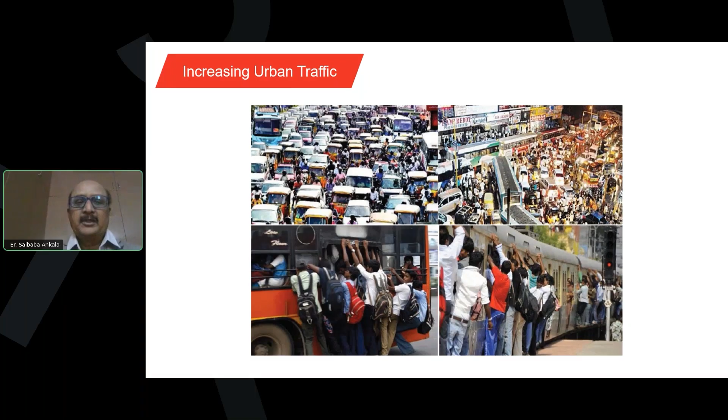So let me start with the basics, just to have a foundation why a metro is required in cities. We all know that the traffic is tremendously increasing day by day, and the existing roads are straining with the traffic, and there is no scope for increasing or augmenting the capacity. So there is definitely need for MRTS in major cities and also tier 2 cities, which Ministry of Urban Development

has already notified. And some of the factors which are required to decide the type of MRTS, because there are different types of MRTS. Metro is one of the options. So we have to evaluate the various options available before deciding on metro, because metro is cost intensive and also takes more time for construction.

So I have listed down these factors here: safety and speed, comfort and economy, technical constraints, reaching the masses, mode integration. The different modes like railways are there, then bus service is there, then the MRTS is there. All the 3 modes have to properly integrate with each other so that passengers will have the last mile connectivity. Some of the options which I have identified and which we have studied for the various metros are like this.

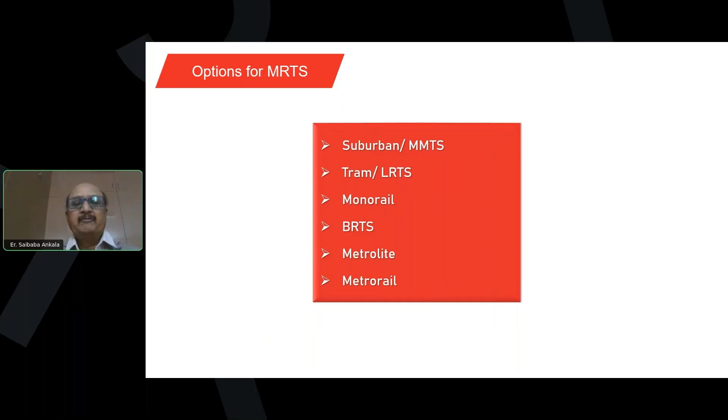And if I go a bit in detail, MMTS, multimodal transport system, is somewhat popular in Hyderabad. Though it has got some advantages of being cheap, because the existing railway network is more or less used, existing railway assets are also used. So the additional infrastructure required is not much, and it can carry high capacity. But on the demerit side, we have limitations. MMTS has got fixed corridors. Only wherever railway lines are there can these MMTS services generally be provided.

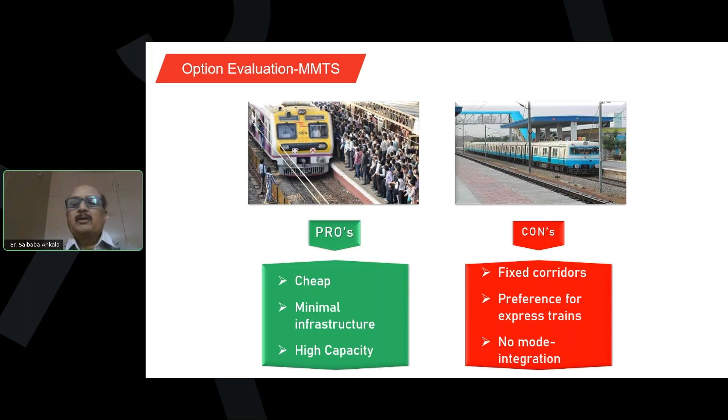And the preference will be given for express trains. If it is a mixed type of traffic where the normal trains are also provided, then MMTS trains will be given less preference. And mode integration is not very much achieved in this type of transportation system.

The second option, of course, is the trams, which is popular only in Calcutta in India, but in the European countries, this is a very popular form of transportation. If somebody has visited France or Geneva or Switzerland, it's a very popular system and very efficient system. So it is always better to study the options of tram also.

So on the pro side, we have being cheap because it's on the existing road. We lay the tracks. There is no additional infrastructure required. Only rails are to be laid and overhead electrification, if required, has to be laid. And coming to the con side, it is a bit slow and it is unsafe. It occupies the road space and also it is inflexible.

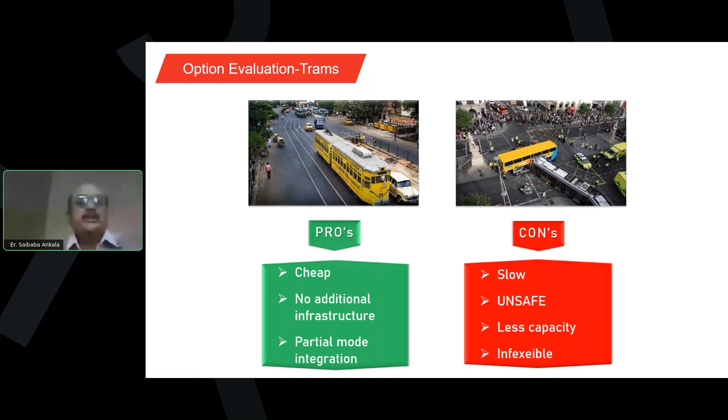The other option, third option, is monorail. It is there in some of the cities in India, like Mumbai, where they found that it is very cheap. It can suit very sharp curves also, and it occupies less space and is good in mode integration because it can be laid on the interior parts of the cities also, where the width of land available is less. But the main drawback is capacity is very less.

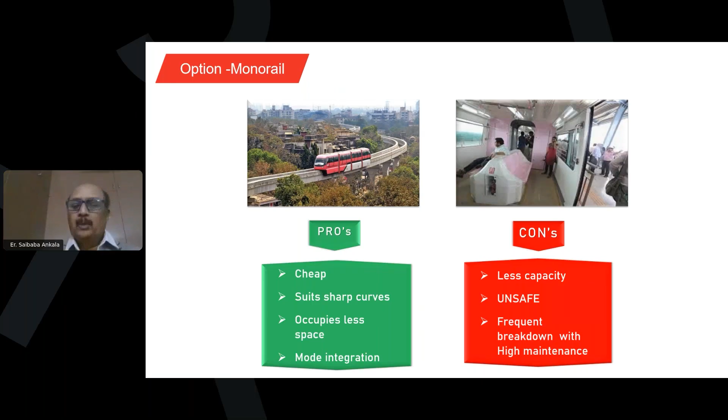So it cannot take the peak capacity which is demanded by a major city, and it is a bit unsafe. Some accidents have been reported on monorail also, and breakdown has also been noticed and reported, causing high maintenance costs.

The fourth option is BRTS, Bus Rapid Transit System. This is also popular. I myself have seen in Ahmedabad. It's very efficient and people are very happily using this service, mainly because it is connecting to the different parts of the city by road, and the connectivity to the other modes is very much feasible and it is very energy efficient. But coming to the con side, this type of luxury cannot be accorded in cities like Hyderabad

because it occupies more space. Dedicated lanes are required. You can see here the buses are running happily, but on the right side, the regular traffic is totally congested because they have sacrificed one of the lanes to the BRTS. So unless we have adequate land, this may be suitable for greenfield projects and new corridors, but not for the existing cities.

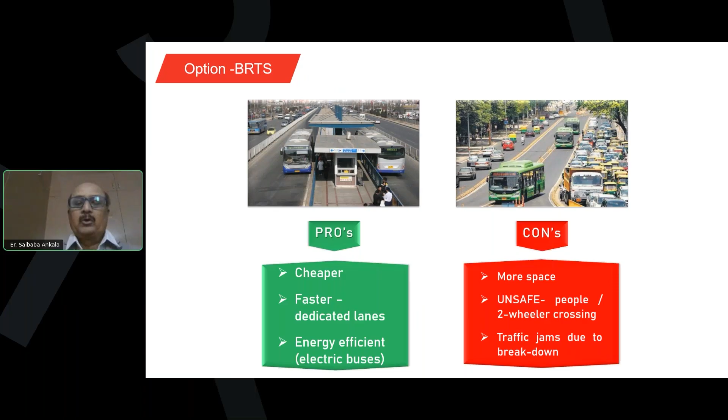There was a talk about Metrolite, which is somewhat similar to tram, but it has not taken off because its technical feasibility is still not established. So this option also is not feasible.

And then metro rail, the pros are it has got a higher capacity. It's a clean and green type of transport system, safe and comfortable because it's fully air conditioned and it is fully elevated or underground with tracks well designed. And the speed also is very high because we can design the system for a maximum of 70 and 80 kmph.

But on the demerit side, the capital expenditure, capex, is very high, and the time required for construction is high, and even the opex, operational expenses, are also high. The maintenance of all the rolling stock and the assets is going to be high.

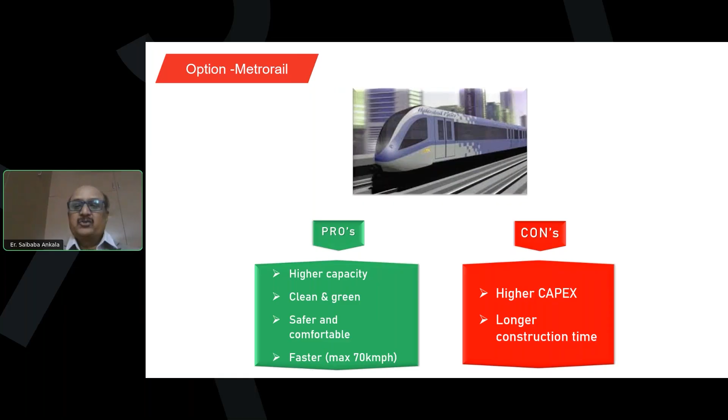But overall, I'm talking in the context of Hyderabad, we have noticed that yes, metro rail is having a lot of overriding merits compared to the other modes, which I have listed here: speed and reliability, environmental benefits, economic advantages, and urban decongestion. So, because of this, metro rail has been chosen for Hyderabad, apart from the other modes which are already available, and the gauge which is required for the metro.

How to decide the gauge? We have broad gauge in India and also meter gauge. Broad gauge is also called the national gauge because we have 1.25 lakh kilometers of it. So as a common man, the thinking will be, why can't we go for broad gauge so that we can integrate the metro also into the existing railway network?

But the thinking is wrong because the metro rail will be totally having a different corridor, different crowd, different passenger traffic, different logistics, different frequencies. So broad gauge is not necessarily to be provided. Then what is the gauge to be provided?

Overall, if you see the 34 countries in the world, the gauge that is being used for metros is standard gauge, which means that standard gauge is already a proven system. Already the technology is available, the system is available, the equipment and the people who have worked in this type of standard gauge, and the rolling stock and all the other subsystems are readily available off the shelf for standard gauge.

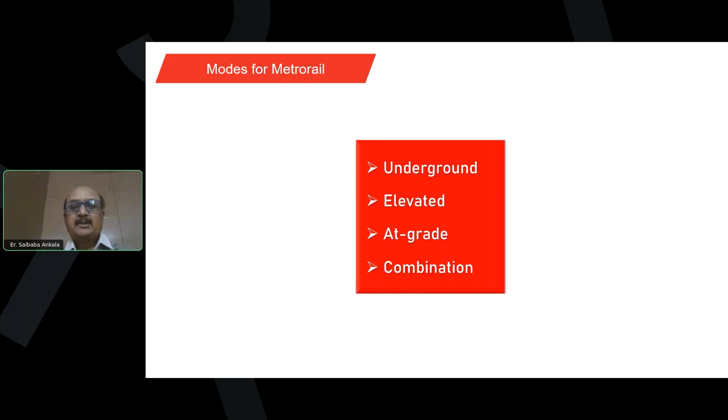Another advantage of standard gauge compared to broad gauge is that, being a slimmer gauge, it can negotiate curves in a much better manner. Once we decide the gauge and the metro rail, the next step is how to take it, whether it should go underground, elevated, at grade or a combination. So quickly we'll see the various options and how we evaluated them for Hyderabad Metro.

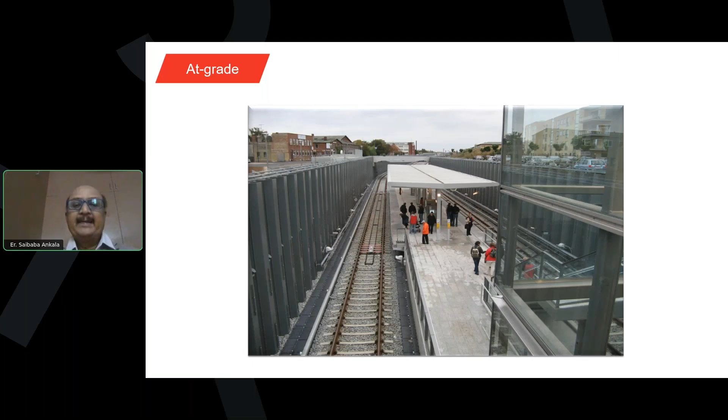So this has been ruled out for Hyderabad Metro. At grade means the metro will be at the same grade as the existing road. But here again, we need a lot of space. Like I explained in the previous slides, a separate dedicated corridor with a fenced, barricaded area is required to run these metros at grade. So this is next to impossible for a major city like Hyderabad, where all the roads are already highly congested and we don't have any spare capacity for the metro at grade.

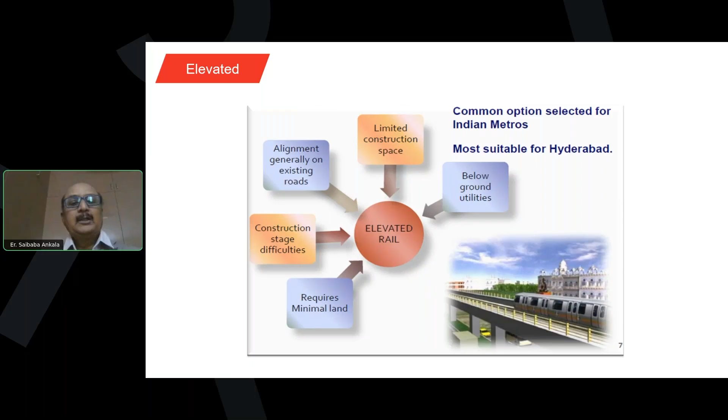So the third option is elevated, and this was found to be most suitable for Hyderabad, because there is no need for underground or at grade. Very good rock is available at shallow depths of 4 to 5 meters, so open foundations can be constructed, which are most suitable for viaducts and also most economical. So finally, Hyderabad Metro has 3 corridors, total 70 kilometers, and all 3 corridors have been provided with elevated viaducts.

Critical issues specific to elevated metro: because metros are generally constructed well within the city, there are some issues which need to be addressed properly. There's a lot of noise, vibration and pollution generated due to construction activity, which has to be minimized. We followed international safety norms, had a team of experts from different backgrounds monitoring these activities, and ensured the work is mostly during night times, when traffic is less and progress can be better.

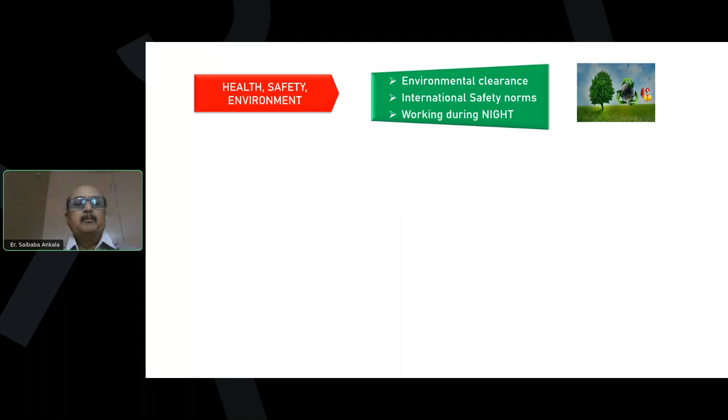Restricted space. We have to work, as I said, well within the right of way given to us, and this is forcing us to innovate. So fast track construction is one important innovation we developed here, which comprises precasting and mechanized launching. We also ensured that site activities are minimized, except the foundation and the pier. All the activities are done with machines and with least manpower intervention.

Road traffic control. In spite of minimizing the space required for construction, some road diversions and traffic control are required. So we regularly coordinated with the traffic department, the police department and the home department, and ensured proper barricades and signages are provided. And when we work during night time, proper lighting is also provided.

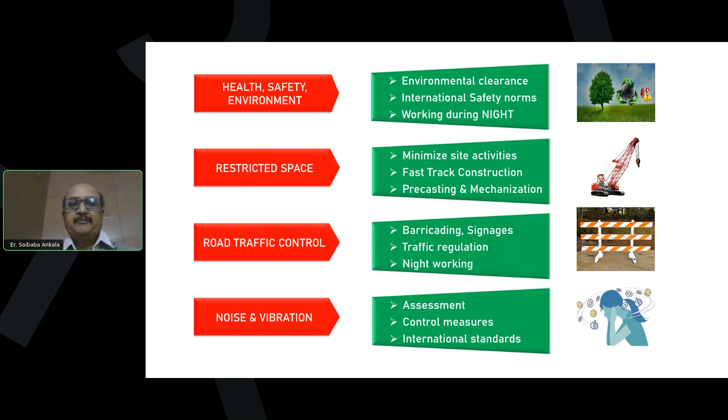Noise and vibration: again, as I said, we followed international standards, and it is properly assessed using instruments, and whenever it goes beyond limits, the control measures suggested by the experts are introduced so that the local people, road users and the general public are not disturbed much.

I will talk a bit about the systems in metro. Systems are like departments in a government or private organization. We have different departments, so here in metro, we call them systems.

So some of these systems are STC, that is Signaling and Telecommunication System. Then rolling stock, AFC stands for Automatic Fare Collection. O&M, Operation and Maintenance. These are the non-civil engineering. And for civil engineering, we have viaduct system and the yard system, depots, the track system. And then electrical department, we have overhead traction power supply department.

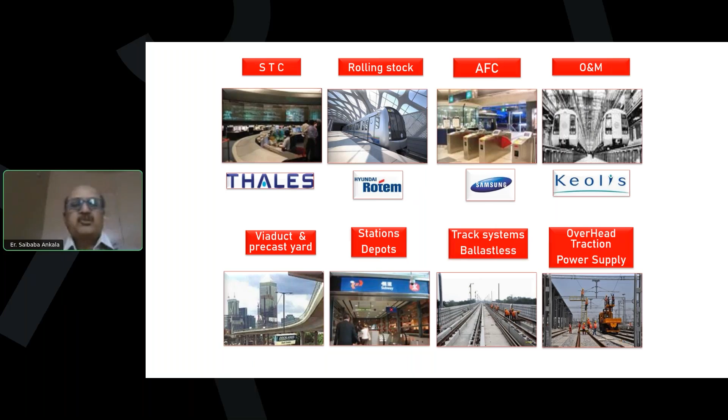Briefly, I'll explain what is the type of system which has been provided in Hyderabad Metro. The communication-based train control system, which is the latest in the world, has been provided here. So the advantages are there is no need of signals. Of course, signals are provided as a second level of defense, and onboard computers are there which control the trains. And the trains can communicate with each other. They can talk to each other.

If they come very close, then the train at the back will be braking or stopping or slowing down. So the end result is we can run more trains at less intervals. That means more frequent trains. So this is the principle of CBTC. The first train can communicate with the following train and accordingly control its speed, which means that the entire block system, if somebody knows about the block system, we call this a moving block, concept of moving block.

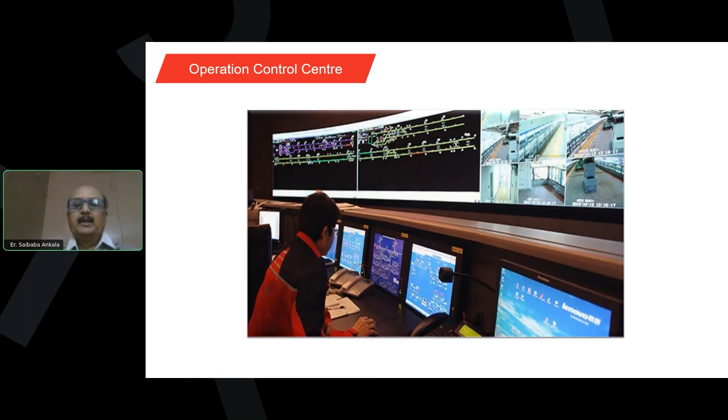And the whole operations are controlled in a central location, which is called the Operation Control Center, where people will be continuously monitoring the movements of the trains. Rolling stock. Rolling stock comprises the passenger coaches or cars, as we call them. And they have got the dynamic air conditioning system. That means the air conditioning gets controlled depending on the number of passengers inside. And 3 cars can hold a total of 960 passengers, including sitting and standing.

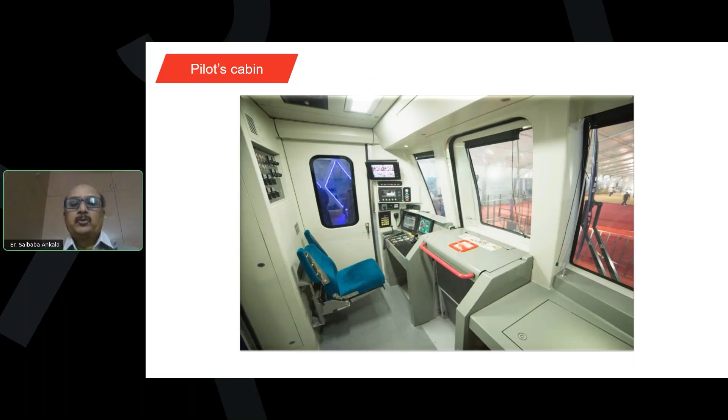This is the cabin of the pilot, which is fully equipped. The pilot's role is just to open and close the doors. He has no control on the train as such, because as I said, the onboard computers in consultation with the OCC will be controlling the trains. Some of the features inside the rolling stock: it has got disabled friendly features also, and dynamic maps, which give an indication of what is the next station coming and what is the duration. And when new pilots are inducted, simulators are available for training them.

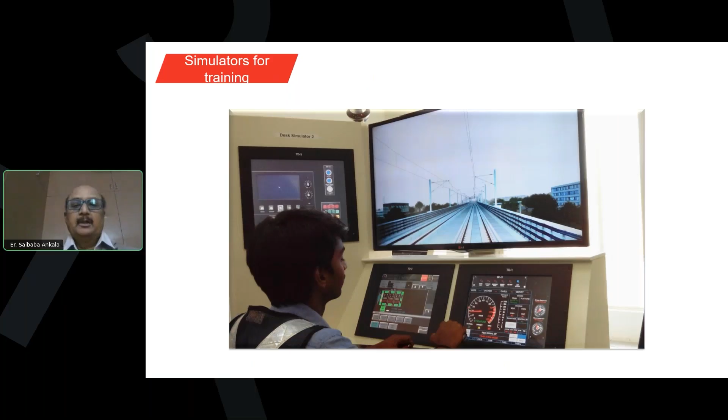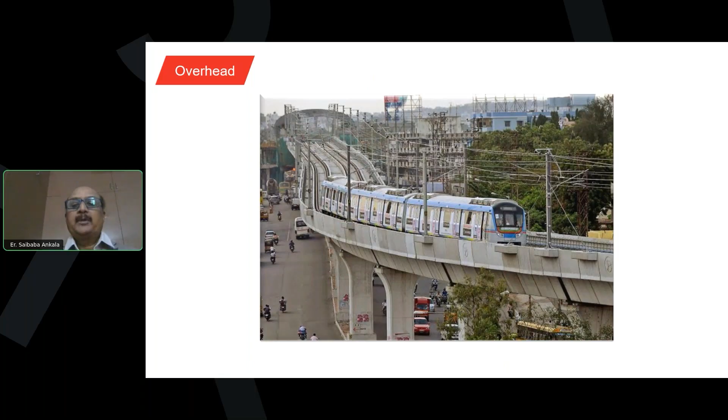The traction means the energy, how the train receives the energy for running. There are 2 systems in metro. One is the overhead electric traction, and the other one is the third rail. So overhead electric is the most common one, which is similar to the Indian Railways electrification system. The electric wires are on the top, connected by masts at regular intervals.

Whereas in the third rail, there are no masts, but a third rail, as they call it. It is there adjacent to the railway track, and the shoes are there which collect the electricity from the third rail, and then that is used for running the motors. So in the Hyderabad Metro, the overhead electrification system was found to be more technically feasible, and that was adopted.

Track system, again, we have 2 different systems, ballastless track and ballasted track. Ballastless track, as the name says, there is no ballast and there is no sleeper also, as we see in a railway track. The advantage is the track is directly embedded into the RCC plinths, as a result of which there's not much of a disturbance to the geometry. It is almost like a fit and forget type of system. But how is the ballast replaced, because ballast provides resilience? That is provided with the special HDPE pads and a combination of elastomeric pads under the tracks.

Ballasted tracks, yes, that is still used. We have adopted it in the depots, where all the trains will be coming for inspection and maintenance. All the other activities of the rolling stock will be performed. So there we have gone for ballasted track.

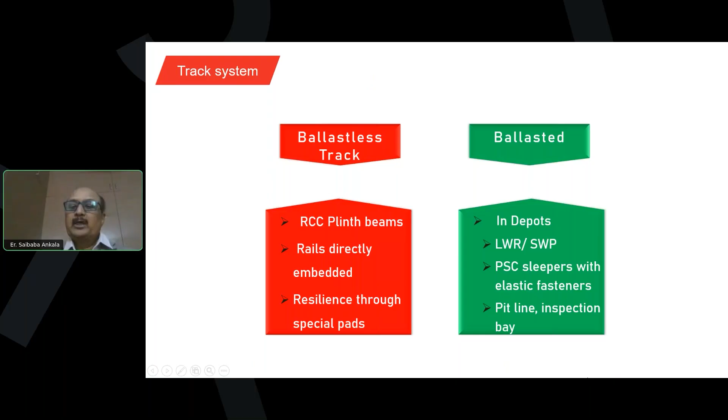This is the ballastless track visual which I am showing, which is directly embedded into the RCC plinth. The RCC plinth is in turn integrated to the viaduct top slab. So this is the system of a ballastless track. And these are the various components. You can see 3 levels of pads are provided to give the resilience.

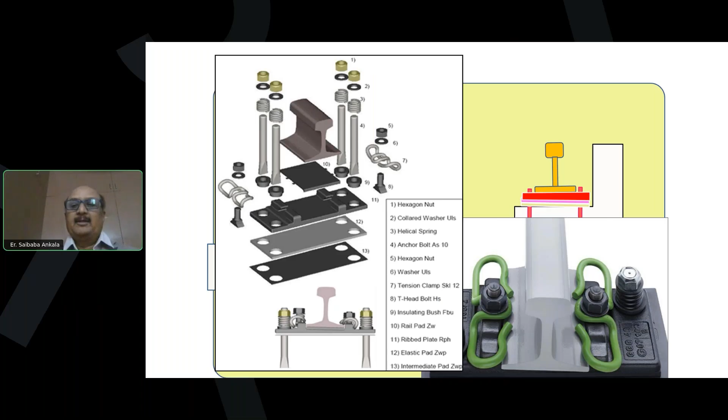Now, coming to today's main topic, optimization. Why optimization is required in metros, especially because viaducts are something which are highly repetitive. We have the option of deciding the number of spans and repeating the same spans. If it is segmental, then segments also will get repeated. So there is a scope for optimization as the quantity of the items is very much on the higher side.

It is in thousands. So even if I can save 1 lakh rupee on one unit, then I can save crores of rupees. That is why optimization is required for elevated metro, because it directly reduces the capital cost and construction timelines. Brief example of why optimization will be helpful in concrete, which is required for this is again for Hyderabad Metro project. Approximate requirement of the various materials.

Concrete is 19 lakh cubic meters. So you can understand, even if per cubic meter you can save 1,000 rupees, you are going to save a huge amount. So innovation and optimization is the key, and this is what has been achieved by doing a lot of innovative measures in the concrete, like adding fly ash and adding manufactured sand. This Hyderabad Metro is the first metro where not even a grain of natural sand has been used. It's all completely manufactured sand.

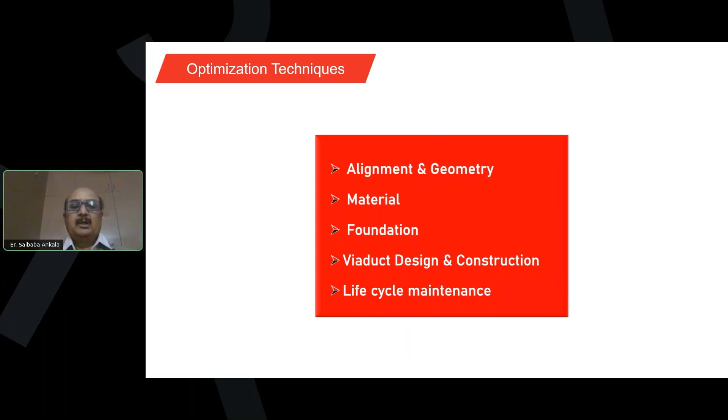Optimization techniques which we have followed and which fields we have applied is like this: alignment and geometry, material optimization, foundation optimization, and the most important, viaduct design and construction optimization, and life cycle maintenance optimization. I'll briefly talk about each one of them.

Alignment and geometry. So curvature has been properly taken care, because existing roads have very sharp curves. We cannot take such sharp curves not only from safety, but also comfort point of view, and also providing the required super elevations and maintenance. So this has been minimized at the same time to ensure that the required curvature is provided. Then the vertical profile also similarly, we have avoided steep gradients, and the stations are always on the straight and level alignments.

Span arrangements, because the viaduct is all along in the median, so we have the full control of the arrangement of spans, especially on the straight reaches, and we have provided uniform spans to the extent possible so that standardization can be easily adopted. And super elevation also has been optimized here in Hyderabad. Again, I think this is the first of its kind when it was constructed. I'm talking about 10 years back.

The super elevation or the cant provided for the plinth on the curves has been provided as per the simulation studies, duly considering the speeds of the rolling stock. As it approaches the stations, it comes down, again it picks up. So all that has been simulated, and accordingly, the speeds on the various curves are different. Though the design speed of the entire section is 80 kmph, each curve has got its own design speed depending on its location. So this way also we have optimized the material consumption.

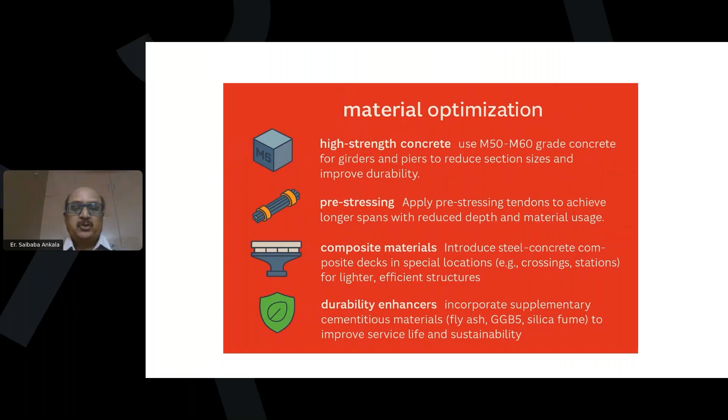Foundation optimization. Geotech matching is one concept which has been adopted here, where we have grouped the foundations based on the SBC criteria. Pile foundation was very much limited. It's only for the larger spans where we have gone for pile. So there is not much scope for optimization there. And soil improvement, wherever the soil was not to the required standard, especially in the depots, we have done the soil improvement measures also. And for foundation excavation, we have used trial trenches and GPR, ground penetrating radars, to ensure that we are not damaging any existing underground utilities.

Construction optimization by precasting and pre-assembly and mechanized launching. And the launching girders used are also designed by our own team, to ensure that it is suiting the requirement, and also for the curvatures which we are having on the metro rail. We used to get almost 3 spans per week.

Balanced cantilever bridges have been used at road junctions, especially where longer spans are required. But at the same time, we cannot take any support from the bottom. So the entire balanced cantilever construction has been done without obstructing the road traffic below, either from traffic point of view or from safety point of view.

And of course, for the road over bridges at 2 places like Secunderabad and other location, we have 80 meter span. So we have gone for composite through girder bridges. And for the stations, we have used the spine and wing concept, which was almost a very new and innovative concept, which I'll be explaining to you in

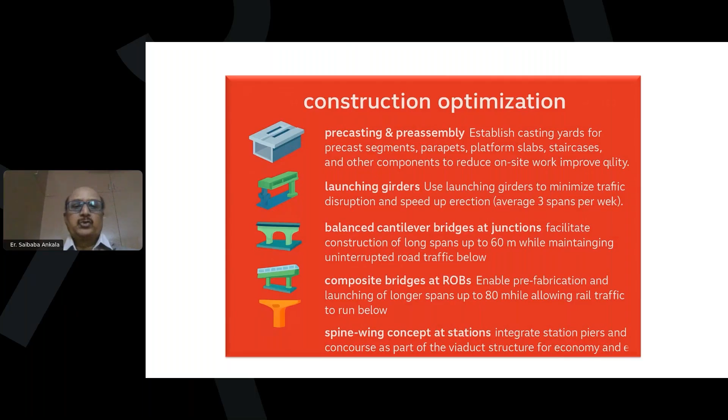the due course. Similarly, for the life cycle maintenance, because the Hyderabad Metro was constructed on BOT basis, maintenance also is a part of the contract. So optimization of maintenance was also found to be very much necessary, and maintenance has been achieved by ensuring that we have durable material there, which requires minimum maintenance and inspection efforts like durable bearings and expansion joints, and surface treatments, then access provisions so that each and every part can be easily accessed by a person and can be

inspected carefully, especially the segmental girders. Joints between the segments ought to be carefully examined, especially at the bottom where the tension is there, to ensure that there is no crack or there's no opening. I will talk about only two systems, viaduct system and station system, where we have done the optimization.

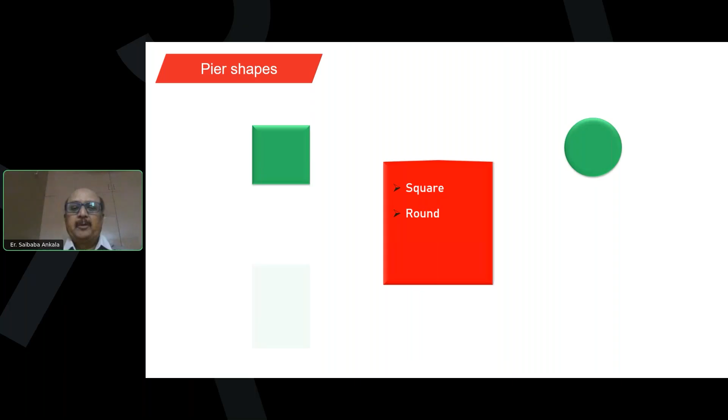The shapes of the pier, we have different shapes of the pier depending on the location, but most of the locations we have adopted the square to fit into the median space available. So it is something like this. The median space is 2 meters. So to the extent possible, we have ensured that it's a 2 meter square pier. If at all more width is required, then we used to make it as a rectangle, but the 2 meters is not compromised because that is the maximum that is allowed.

And we have ensured that a crash barrier of 1 meter height is provided all around the pier so that the forces which are coming due to impact of any accidental vehicle will not be directly felt by the pier. It will be absorbed by the crash barrier. And the profile is so selected that the stresses also flow in the same direction. The flaring up of the pier cap and the box girder is an indication of the pier and superstructure profiles from a width of 2 meters almost up to 14 meters at the top has been achieved.

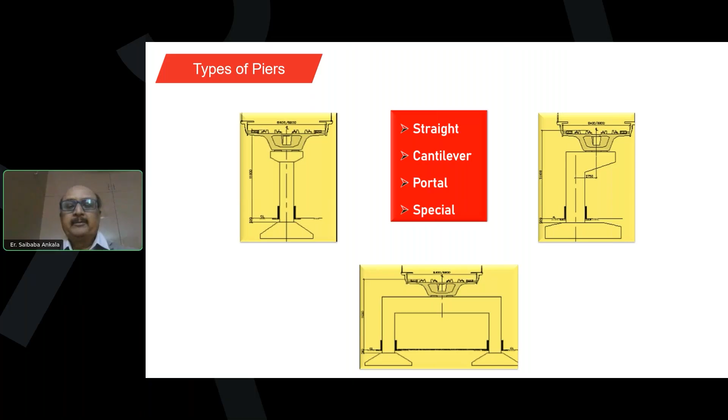Coming to the types of piers, because depending on the location, we need to provide either a straight pier or a normal pier, we call it, or a cantilever pier, where the pier at the top is having a small cantilever on which the segment is supported, or a portal. Sometimes we have special pier like a hammerhead pier, we call it, or a station pier. These are special piers.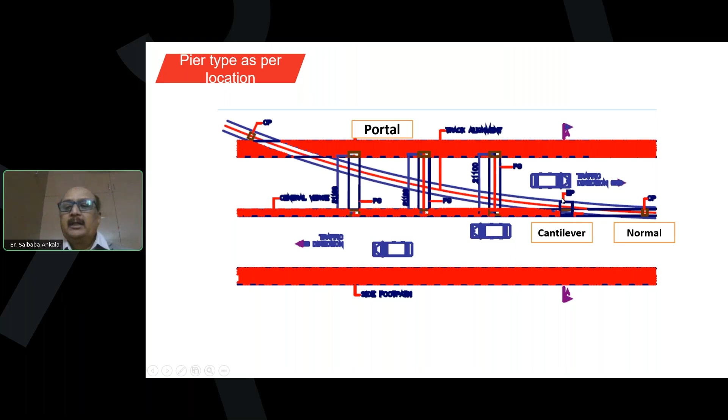You can see this is the metro which is crossing the road. This is the highway which is crossing the highway going to the median. So here we have portal piers, and here we have cantilever pier, and then it comes back to normal pier. Normal pier looks like this, a cantilever pier looks like this, and then a portal pier. You can see that a limitation is there for the cantilever. If the alignment is at the center of the carriageway, then we cannot have a cantilever, we have to go for a portal pier, and it is like this.

And coming to the viaducts, there are several options available, and we had to evaluate all the options, not only from the economic point of view, but also from the logistics point of view, how to cast them, how to bring them to the site, how to construct them. So, however, we made a detailed analysis of all the options, and finally, we have adopted the most popular option of box section, trapezoidal box section.

Some of the advantages of having a box section, it is a more optimal section, being the entire area is only confined to the periphery, and its torsional stiffness is also very high. And the top width can be varied depending on the requirement. Of course, this is not adopted because metro requires 2 tracks, and we have adopted the straight normal box shape.

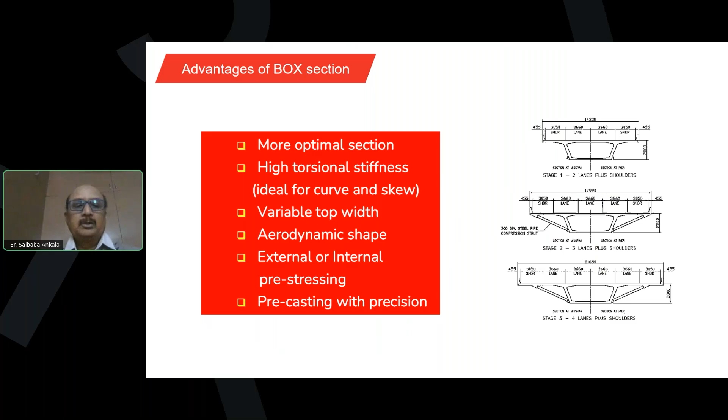Advantages of segmental. It is ideal for fast track construction, and we can do the standardization of span, and we can optimize the design and control the geometry in a much easier manner. How to decide the optimal span? Because there are different studies which are to be done before we decide what is the optimal standard span.

So these are the various factors which I have listed. Important among these is the RSI studies, that is rail structure interaction. Due to the welded rail, LWR, we call it long welded rail, and the simply supported girders, there is an interaction between the two, due to which heavy forces are applied by the track onto the girder and vice versa. So this depends on the span length.

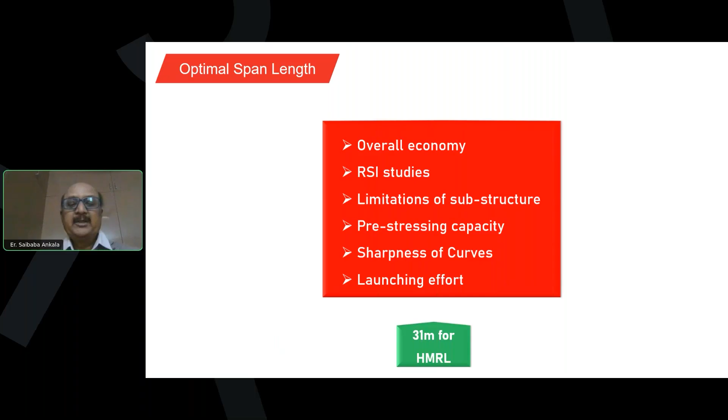So we cannot have very high lengths because the forces will become beyond control. So this is one criterion which we have to evaluate while we decide the optimal span length. So with all the studies for Hyderabad Metro, it was found that 31 meters was the optimal standard span.

And a segmental bridge span is constructed in segments. The box shape gives the torsional rigidity. Generally the pier segment is a shorter one because it has got a diaphragm inside, so it is a very heavy section. So it is shorter, its width is lesser compared to the normal segments. And it all depends on the lifting capacity of the gantry.

I've listed the various advantages of the segmental bridges. Long spans, it is economical, efficient use of materials, because pre-stressing material can be used in a very optimal manner. Then fast track construction, minimal traffic disruption, reduced environmental impact. These are some of the points.

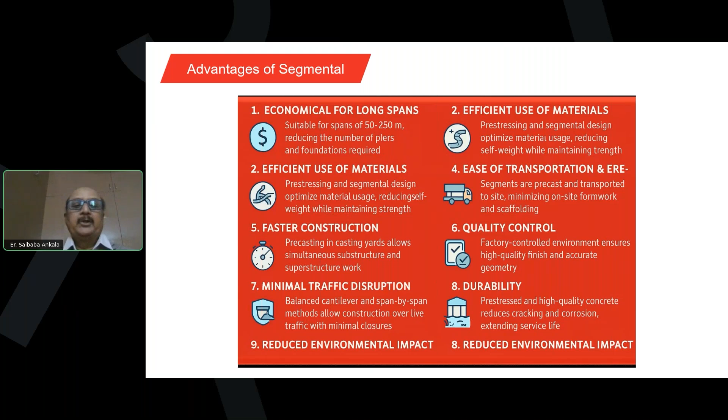And box section, which I have already explained, the advantages of having a box section: high torsional stiffness, efficient load distribution, reduced self-weight, and aesthetically it's a slim profile. Some metros use the inside space for utilities, for running cables and for running pipelines.

How we have optimized the design, you can see here the different segments: S1, 2, 3, 4, 5, and again 4, 3, 2, 1. So S1, 2, 3, 4 is like a mirror image. S5 is a common segment, which is like a joker in playing cards. I will show you later the importance of S5.

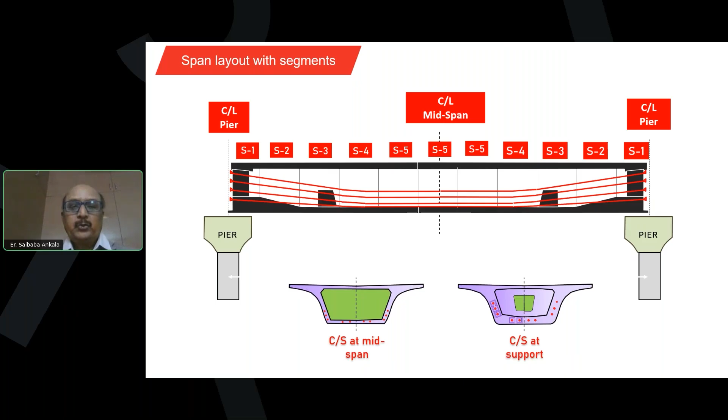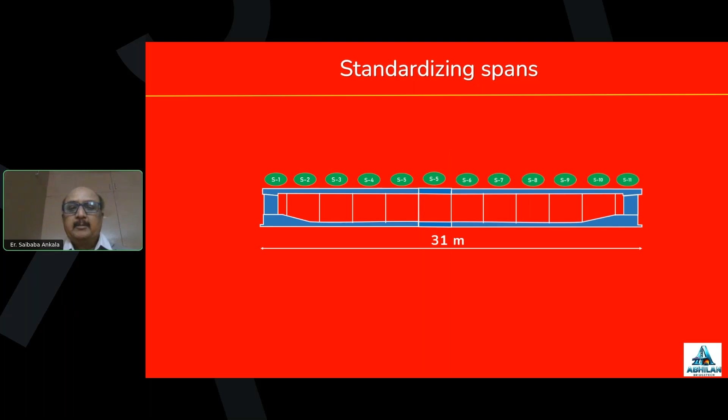For the construction of segmental spans, there are 2-3 methods available: long line method and short line method. Before that I will explain how the standardizing of the spans is made. You can see here S1, 2, 3, 4, 5, again 6, 7, 8, 9, 10, 11. Now, if I have to increase the span, I can simply add one S5 segment, which makes it, earlier it was 28, it becomes 31. Similarly, by adding another S5 segment, I can make it 31 to 34 and 34 to 37.

So this is the most important advantage of segmental construction, where we can standardize the span, and just by adding or removing one standard central segment, we can use the entire assembly for the different spans.

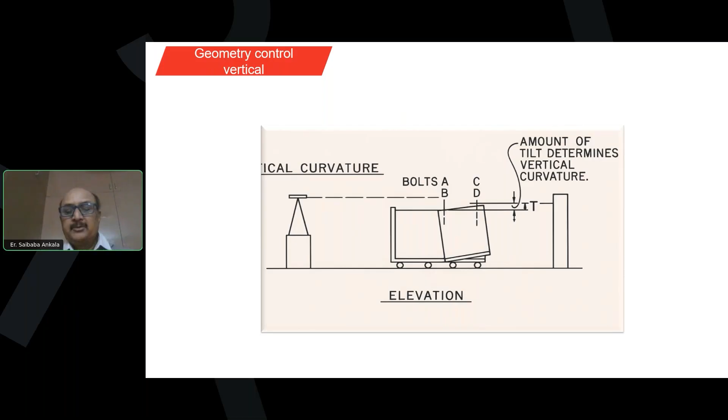Precasting is generally done by short line method. This is the casting yard. Short line method is generally adopted in the casting yards, but this requires a huge amount of geometric control because the viaduct will be curving both in the plan and in the vertical profile because of the vertical curves and horizontal curves. How it is done, I'll just show you in some sequence of segments.

The first segment is cast as it is, and then it is moved to a further location, and then it is rotated slightly to the degree which is required as per the actual alignment. And then the second segment is cast by keeping the first segment as the support for casting.

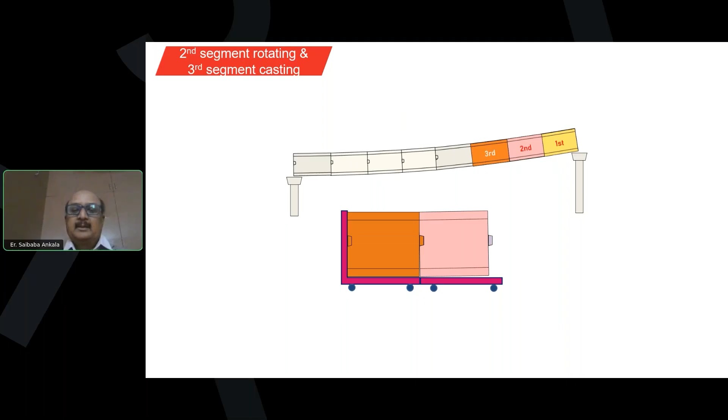And then the first segment is removed, and now the second segment is slowly rotated to the extent required, and the third segment is cast. So this is how the casting is done, by controlling the geometry and giving the vertical profile during casting itself so that it will achieve this profile during launching. A small video on how the casting is done.

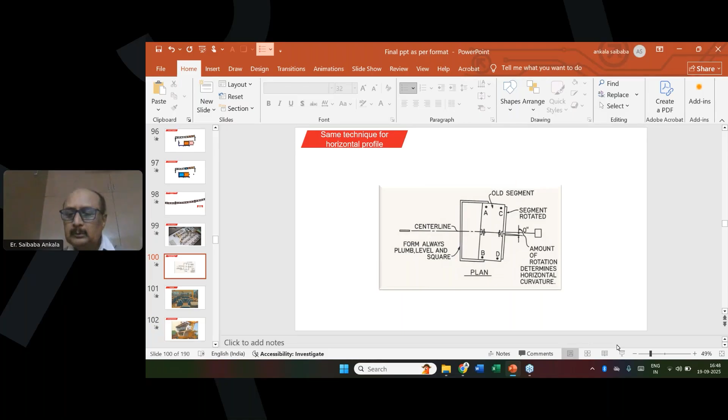And for erection, we have a launching girder, a steel launching girder, which extends for almost 2 spans. And this is design and fabrication. There's a code for this. Load testing is also done before it is launched. The segments are transported.

The launching girder lifts the segments, keeps them in position, and then epoxy is applied between the segments. This is very important because epoxy acts as a lubricant when it is in the wet state. At the same time, it acts as a bonding agent and also moisture control during service.

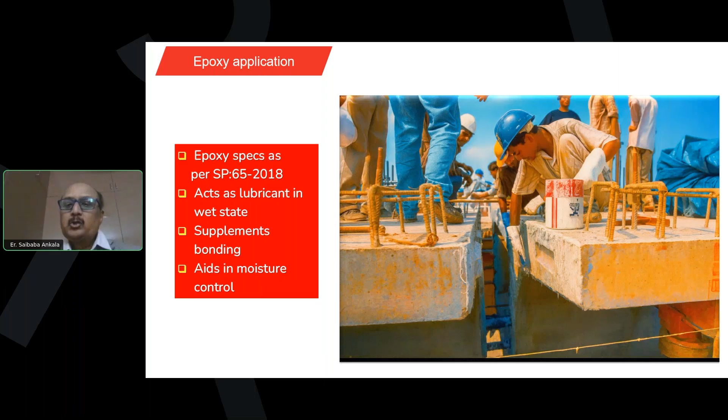A temporary pre-stressing is done between the members so that the epoxy gets strengthened, and after that, the permanent pre-stress is done. The segments which are like this, finally after launching, it will be like this. So this is again another video which shows the launching.

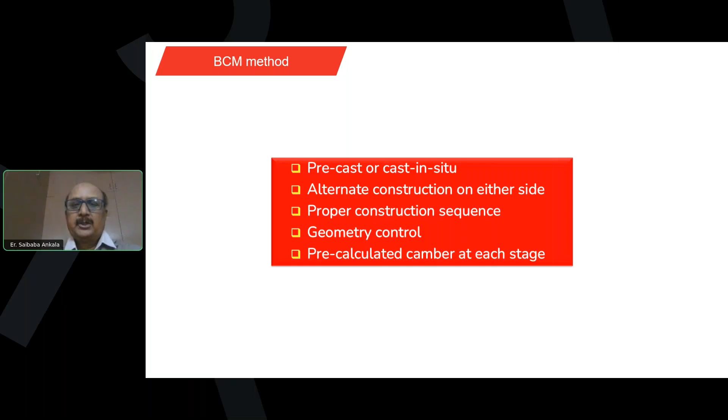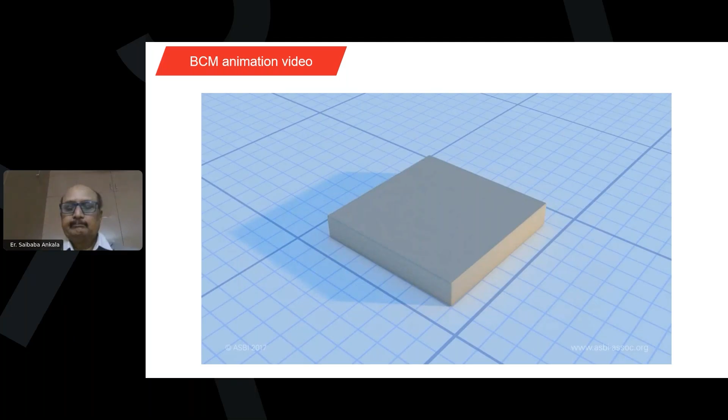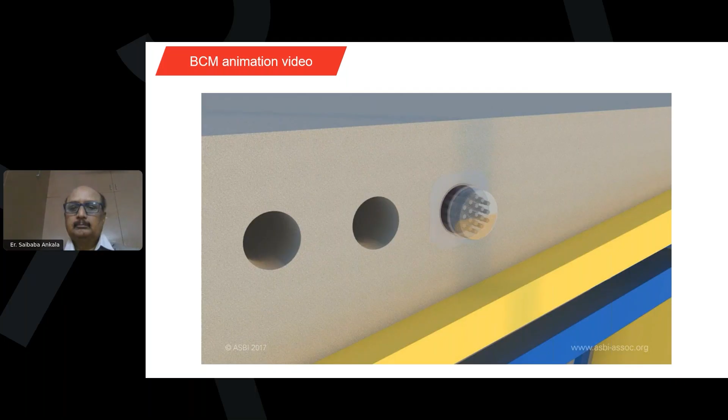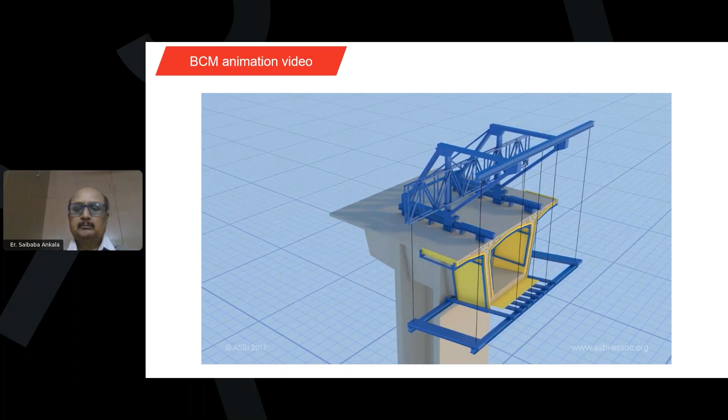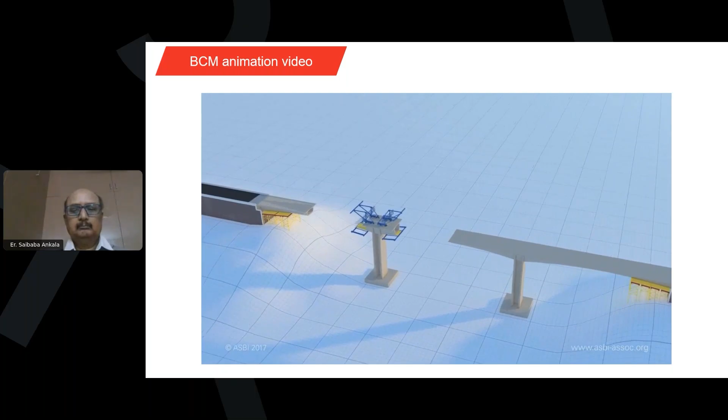At every level, the geometry is to be checked because this is like a free cantilever which will be deflecting. So the deflection should be checked and monitored and properly adjusted and ensured that both the ends match perfectly. And at the end, we provided stitching concrete. That is how the balanced cantilever method of construction is done.

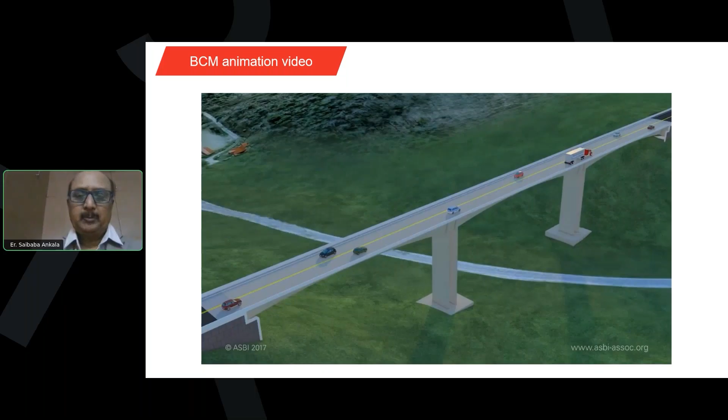The last part of my presentation is the station system. The station also is a very important structure in a metro system, because almost every 1 kilometer we have a station. So 70-kilometer track, 72 stations were there. And some of the technical optimization we have done here is standardizing the station design depending on the number of passengers. Then the spine and wing concept has been adopted, which means precasting of all the elements and launching them, and ease of construction with minimum disturbance to the traffic.

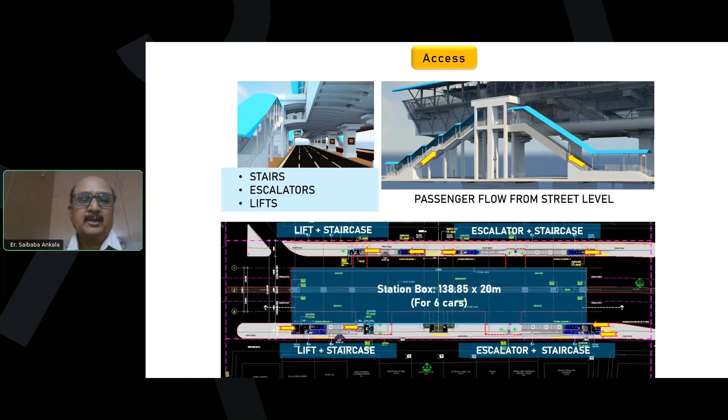So this is the station concept, and all the modes of access to the station are provided: the staircases, escalators, and lifts. The stations have been categorized based on the traffic and also the ROW, and these stations have been standardized. So how the station has been constructed, I'll just explain to you. This is the interiors of the stations with all the modern facilities provided.

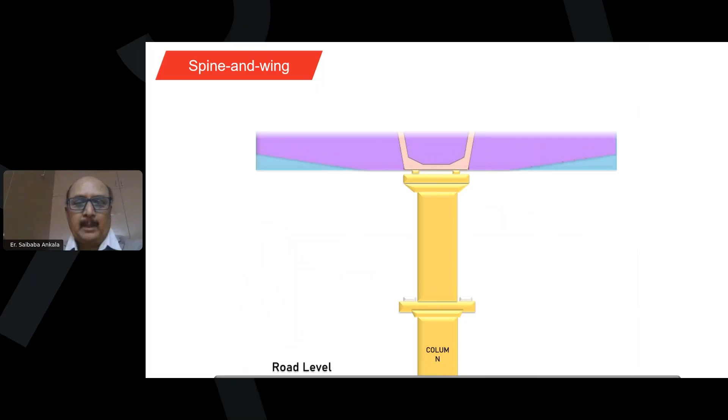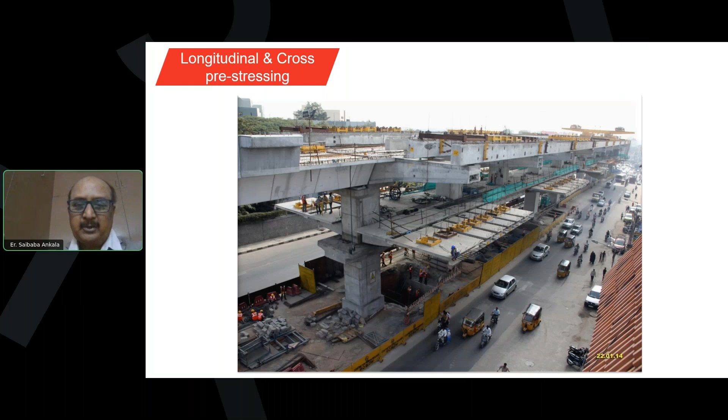The spine and wing concept: there's a single column which supports the platform as well as the concourse level. And all the elements except the pier arm are precast. So these are the station piers where the girders are launched, and then the pier arm, which is the only cast in situ item, is cast. And after that, all the precast elements are brought like spines and segments, and they are stressed and completed.

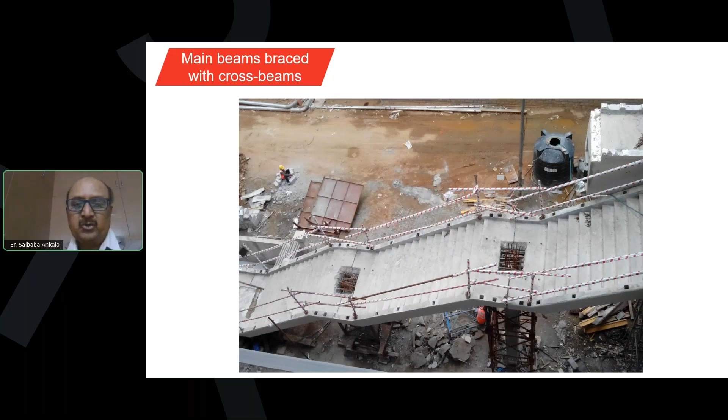And one important point which I would like to mention is the lightweight bricks have been adopted to minimize the load on the columns for the internal walls. And the slabs and the beams for the platforms are also precast and launched by cranes. The entire staircase also is a precast system which has been brought to site and launched.

The roofing system is very important because this is where the passengers are protected. It comprises an arch-shaped PEB structure, very slim and sleek, at the same time very strong to take care of all the loads. And then a galvalume sheet is provided through a purlin system. So these are some of the photographs during the construction.

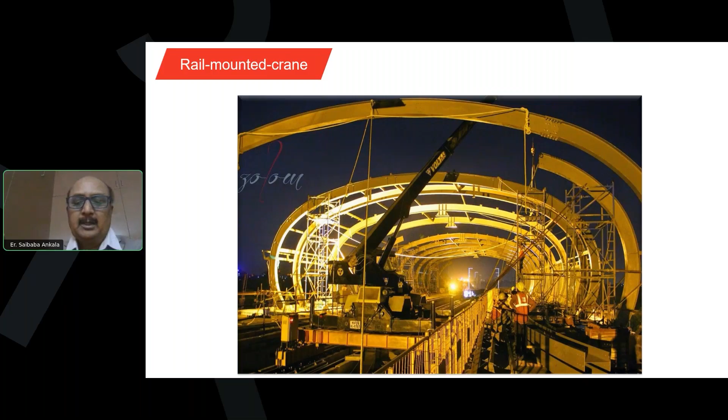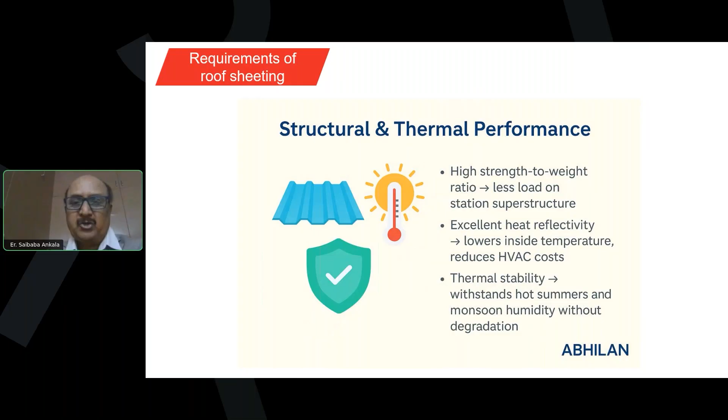And the crane which is used is a mobile crane which is launched on a temporary track laid, and the various members are erected. There's a bracing system and the OHE fixtures which are fixed to the roofing system. The sheeting, as I said, comprises the galvalume. When I talk about sheeting, these are some of the requirements of the sheeting system: economy and speed, structural and thermal performance, corrosion resistance, safety and sustainability.

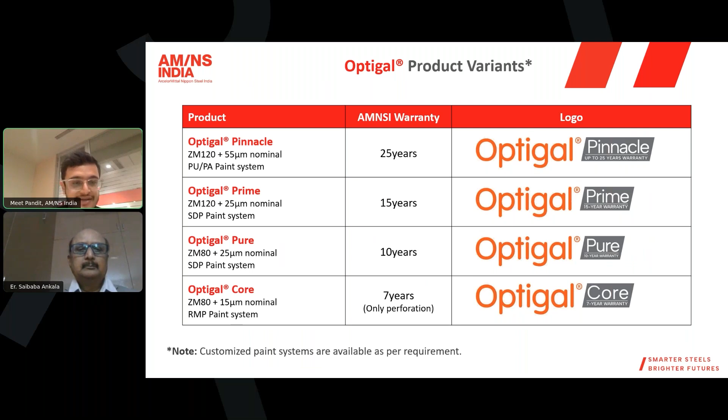As I rightly mentioned, we can cover a wide range of applications with this product, from steel claddings, roofing panels, sandwich panels, architectural facades. This is what we are offering with this product, and I'm sure that this will prove to be a disruptor in this industry.

Thanks, Mr. Meet. So I strongly recommend this product because so many good features are there. I was just requesting all the audience, and strongly advising them, to consider this product because it has got so many features. Because of the addition of magnesium, it has got corrosion resistance. Corrosion initiates at the ends where the cutting takes place, where it's very difficult to maintain the material properties. But because of these added elements, it has better corrosion resistance, which is very important for massive structures like metro roofs and station roofs.

So I would also definitely consider this in all my future projects in railways and metros, not only because of these strong reasons, but mainly because it is make in India, because galvalume we used to import. Thanks, Mr. Meet. And so I'll continue with my presentation.

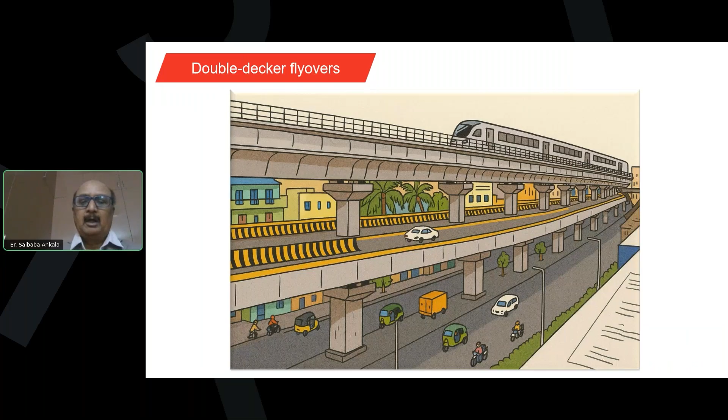The final thing I would like to talk about is double-decker flyovers. Nowadays they're becoming very popular. Nagpur recently got 5 kilometers of double-decker flyover, and I myself have designed a double-decker but integral flyover. You can see at the road level, the girders as well as the pier arm got integrated, which optimizes the space and reduces the vertical clearances.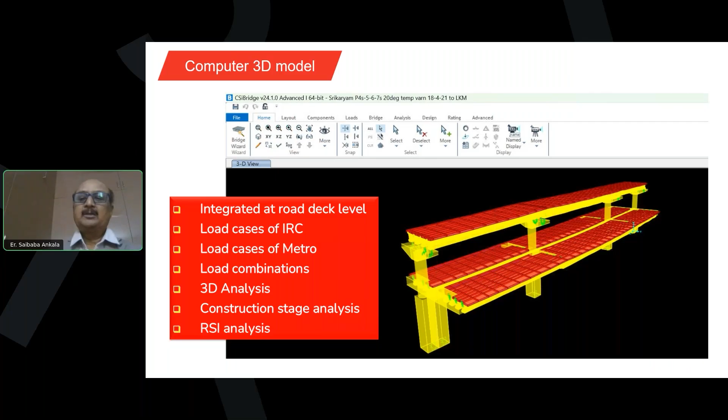This is a model which has been generated, and in this model we have done all the various load cases of IRC, load cases of metro, load combinations, and combination of combinations, to perform 3D analysis, construction stage, and RSI analysis. This is coming up in Trivandrum. There are 3 such flyovers which I have designed for Trivandrum Metro.

Parapet is something which cannot be ignored because it has got so many features. We feel that the parapet is just for protection, but it has other features: it gives support for the cable racks, for the overhead mast structures, and even some substations can be supported on it. And in some metros, the parapets are used as an escape path.